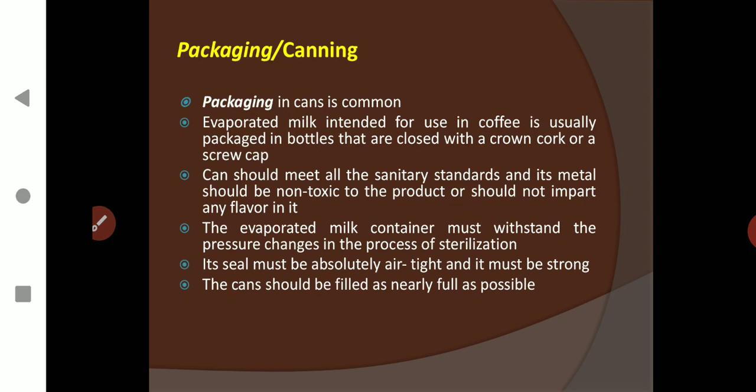So in part 1, we were talking about packaging or canning. We have seen that packaging in cans is common. Before sterilization, we have to pack the product in cans and it should be sealed properly. And while packing, we have to see that the cans are properly sealed at the right temperature and the product temperature should be optimum.

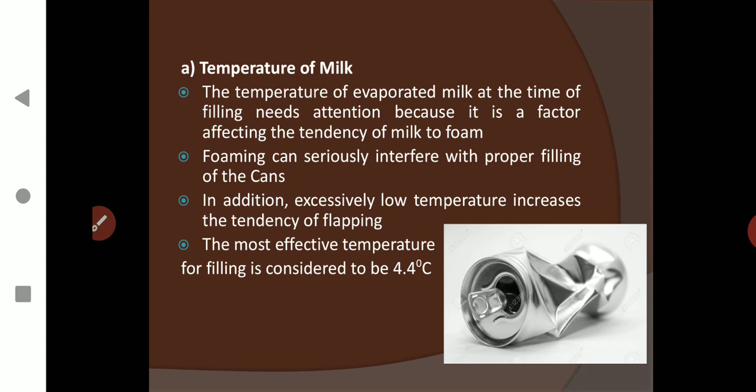It is because if the temperature is high, filling temperature is more than 5 degrees Celsius, there will be foaming and it will interfere with the proper filling of the cans. And if the product temperature is excessively low, there is a tendency of flapping. In this photo, you can see what flapping is. The can will get shrunk. That is why the most effective temperature for filling is considered to be 4.4 degrees Celsius.

Now leakage. It is very important that cans are inspected for visible defective seals first thing, and there should be checks for leak detection. And how do you find if there is any leak in the can? You will pass the filled cans through hot water. There will be a trough, and cans will be passed through that hot water trough so that if there is any leak, the air inside the can will expand and it will try to come out.

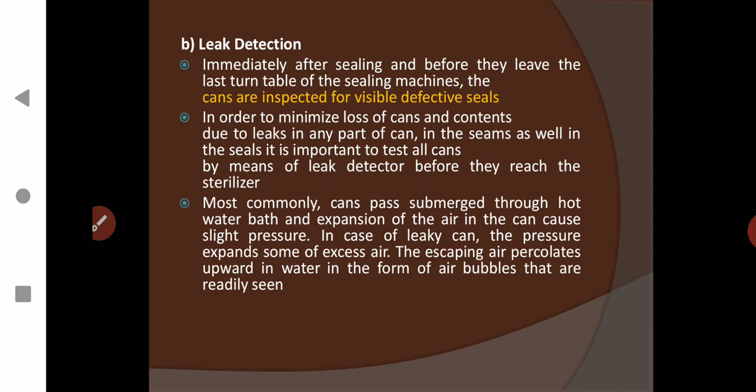And if there are any small pinpoint leaks, you can visually see the air bubbles that percolate through the water. If there are any leaks, you can see the air bubbles coming out of the water, so that you can remove those cans. That is how they normally find any leaks in the can. So you have filled it and found that the cans are ready for sterilization.

Next step is sterilization. There are two methods: in-bottle or in-can sterilization, or continuous sterilization. In continuous there are two types: normal sterilization and UHT sterilization. You are well versed with these terms. UHT, ultra high temperature, you have learned in market milk. For cans, machines with rotary airlocks are used, and for glass bottles, hydrostatic sterilizers, that is, a sterilizer within which you fill water, and that water is heated with steam. In case of cans, you are using direct steam.

So there are two types of sterilizers. In case of a batch sterilizer, you call it a retort. It is similar to your autoclave. Have you seen an autoclave? At least in the microbiology lab you must have seen an autoclave, isn't it? Otherwise I will show you the sterilizer in the coming slides. Okay, not here. Oh, sorry.

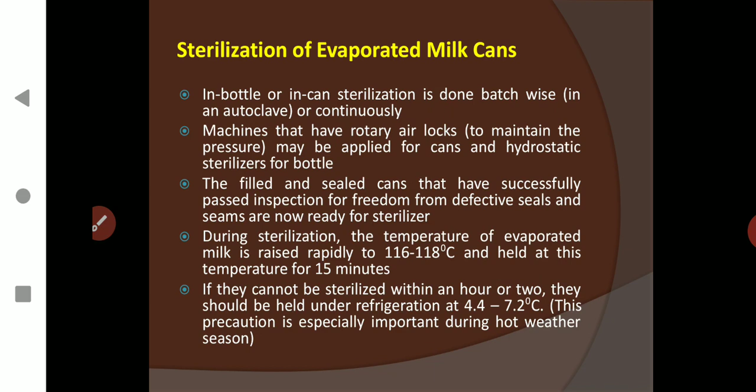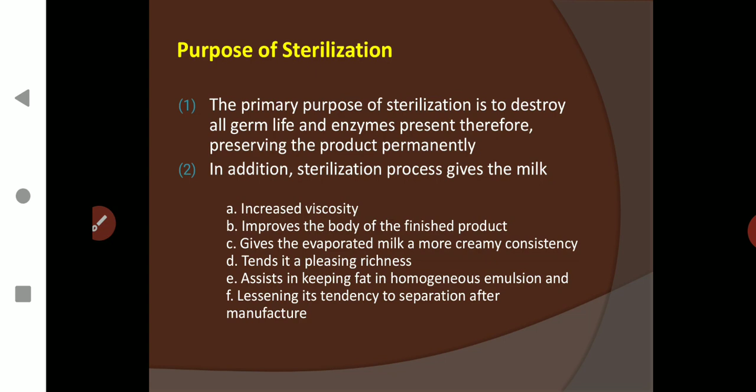Now purpose. The primary purpose, of course you know, is to destroy all germs and to inactivate enzymes present, therefore preserving the product permanently. In addition, sterilization gives increased viscosity, improves the body of the finished product, gives the evaporated milk a more creamy consistency, a pleasing richness, and assists in keeping fat in homogeneous emulsion, lessening its tendency to separate after manufacture. So these are the purposes of sterilization.

Now, the temperature of heating should be 116 to 118 degrees Celsius, and the importance of uniform heating, of course you can imagine, right? Uniform heating is necessary to keep away defects due to non-uniform treatment of all cans and all parts of each can. If you are heating only one part, what will happen? First, the sterilization will not be proper. Second, the shape of the can will change, isn't it?

If you are filling the cans with a product at low temperature, at 5 degrees Celsius, you have a chilled can. So if you are sterilizing it, increasing the heat above 100 degrees Celsius all of a sudden, and the temperature is not uniform on all sides of the can, its shape will change. So that is one thing. Second thing, product quality. It will keep uniform color, consistency, etc.

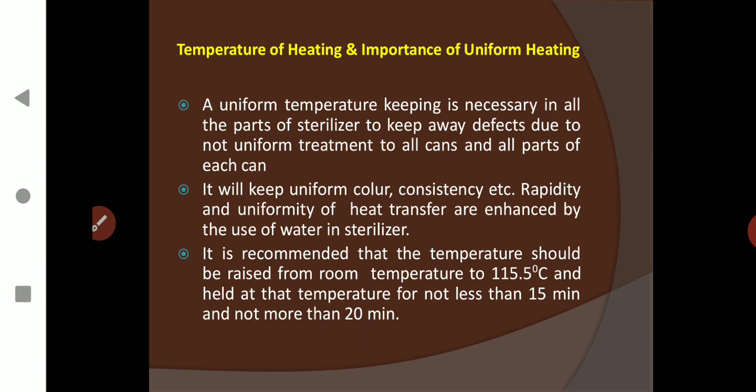Now shaking. After sterilization, the cans are intermittently shaken. Why? There are chances of thickening of the product, or soft curds are formed. So the purpose is to mechanically break down the curd that may have formed during sterilization to a smooth homogeneous consistency.

But you should not go for violent shaking, and the period of shaking also should be minimized. The usual shaking period is kept at 15 seconds to 2 minutes and is sufficient to break normal soft curd. That's it.

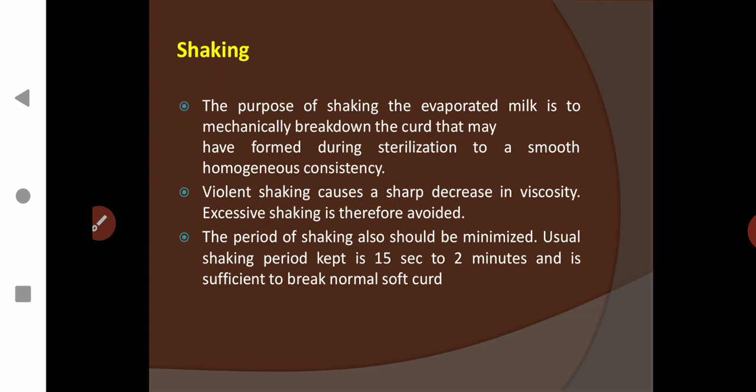Now after sterilization, you have to go for cooling. That is, immediately after the holding time, the evaporated milk is cooled. How do you do that? The steam is turned off, exhaust and drain are opened, and cold water is turned into the sterilizer with reel revolving, and cooling is continued until the temperature of the milk reaches 21 to 27 degrees Celsius.

It should not take more than 15 minutes. So the whole cooling cycle should not take more than 15 minutes. That is, rapid and uniform cooling is important.

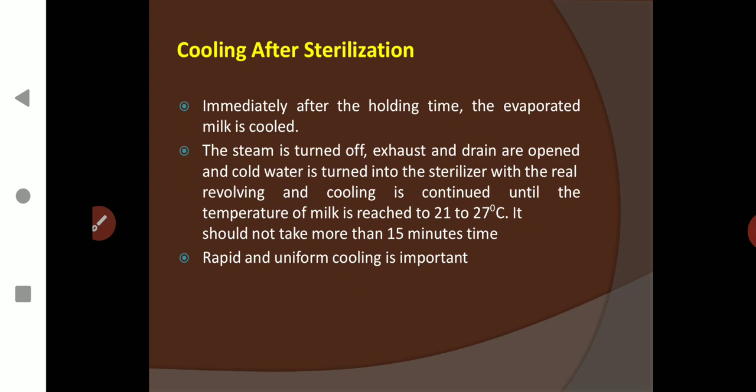So the batch sterilizer consists of a large boiler-like horizontal steam drum opening at the top or at one or both ends. It will have either an opening at the top or at one end or on both ends. Now its hollow interior consists of a revolving frame of spider cage into which the cans are loaded. So these cages are loaded into a frame, and that whole frame will be rotated during the process, so that you can ensure uniform heating.

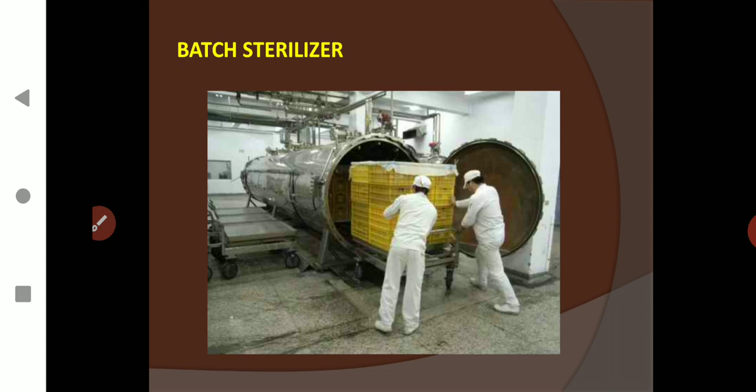Okay. Now a perforated steam distributing pipe near the bottom extends over the entire length of the sterilizer drum for providing steam. Near the top there is a water distributing pipe with connection to the water main. In the bottom of the shell there is a drain for condensate. On the sterilizer drum are also mounted a pressure safety vent, water, steam and vacuum gauges, a high temperature thermometer, a temperature control and other safety devices.

So the process consists of filling the frame with water and heating it by steam, and cans are kept rotating in it. Temperature maintenance and time of heat treatment are controlled.

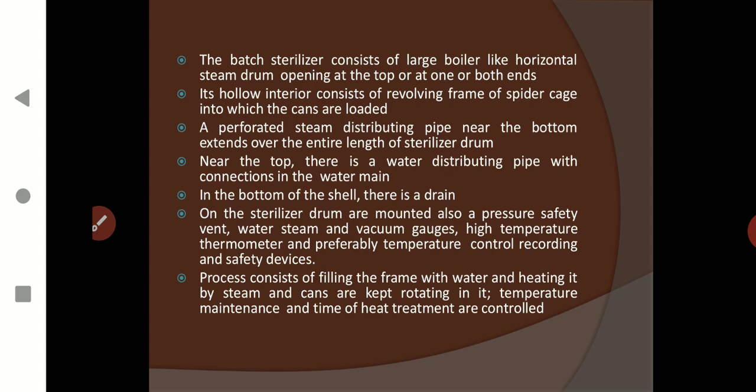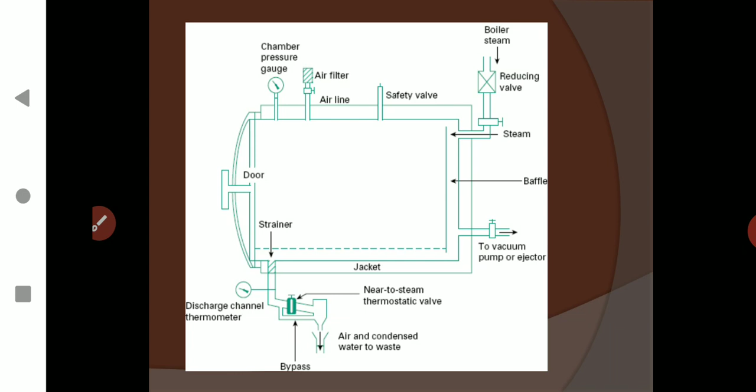And a strainer is kept. It's not exactly a strainer, there will be a valve, so that the steam will not be passed through, but once the steam touches the product, it will condense, and there will be water. So that water has to be removed continuously. So there will be a drain for that. And once the process is over, the whole thing will be cooled with cold water. So cold water will be passed through it. Okay.

Now there is the continuous sterilizer. This is not that important, but it is best adopted in large plants. It is advantageous by reduction of packing labor, elimination of hand inspection and automatic rejection of leakers. But the continuous sterilizer is built for standard size cans only. That means you cannot use larger cans or different size cans or bottles in a continuous sterilizer.

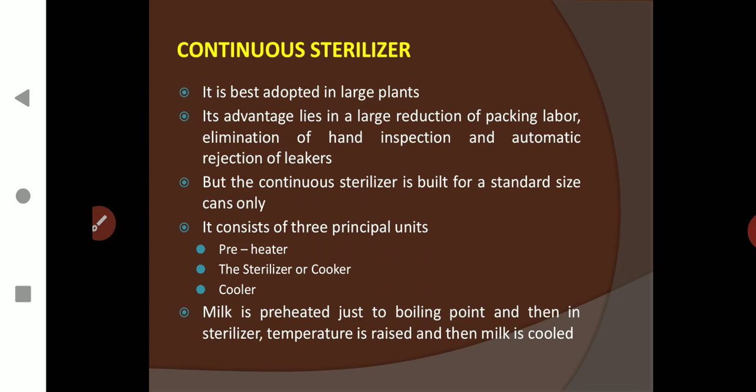And it has 3 units. There is a preheater, then a sterilizer cooker, and a cooler. These are the 3 parts of the continuous sterilizer. Milk is preheated just to boiling point, and then in the sterilizer the temperature is raised and the milk is cooled.

Now the third sterilization is UHT sterilization. Here the benefit is you need not add stabilizing salt, or sometimes you will have to add a very small quantity of stabilizing salt. That is the benefit of UHT sterilization. It is almost similar to that of UHT milk production. The concentrated milk will be passed through a UHT line. You can read the other points.